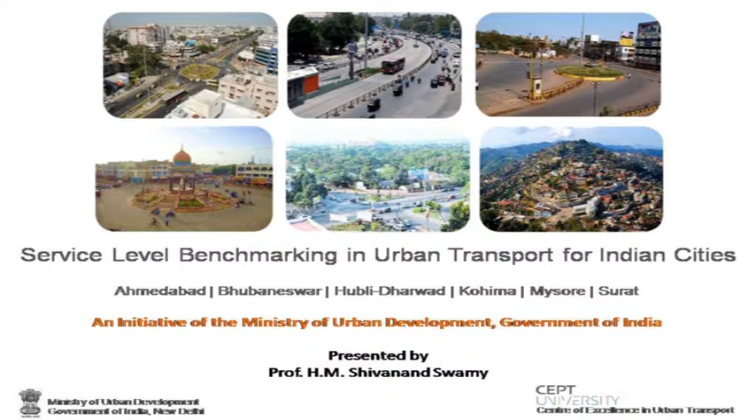We all are aware that service level benchmarking is a measure and a monitor. It is a framework to measure and monitor urban transport performance, established in India in 2010 by the Ministry of Urban Development. What is going on? How are we doing? Who has accomplished what, what are the best practices available today, and where are others, and how can we reach there? What should we do, what should be our targets, and how do we reach there - these are some of the kinds of questions for which one seeks answers through this benchmarking framework.

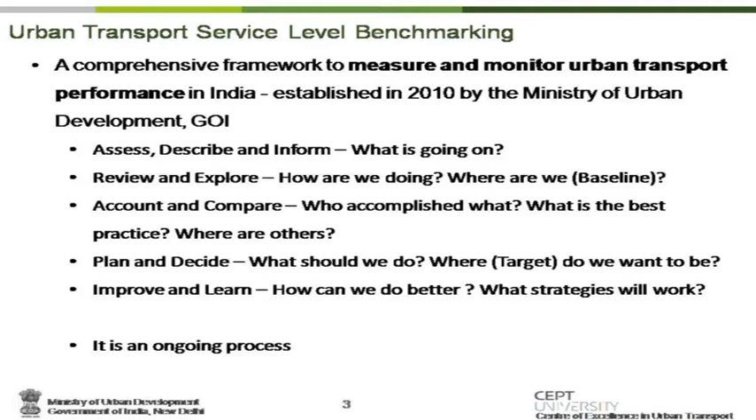It is not a one-time exercise, it's an ongoing process, and therefore it has to be integrated into an institutional process rather than standalone, done by a consultant or a research institution at any point in time.

Next one please. The periodicity part of it is an issue. We did the first round in 2011 and 12, predominantly in 2011. The second round was in 2015 and 16, after a 4-year period.

Whether it should be annual, linked to an annual budgeting exercise of the urban local body, or whether it should be done once in 5 years - it is right now integrated as part of the comprehensive mobility planning process. The question is, is it adequate just to integrate it with the CMP process? Even smart cities, when they were selected, that's also when they were asked to go through this benchmarking part of it. Is it adequate, or is there something more that we should monitor on an annual basis? That is a question we need to decide at some point as part of this discussion.

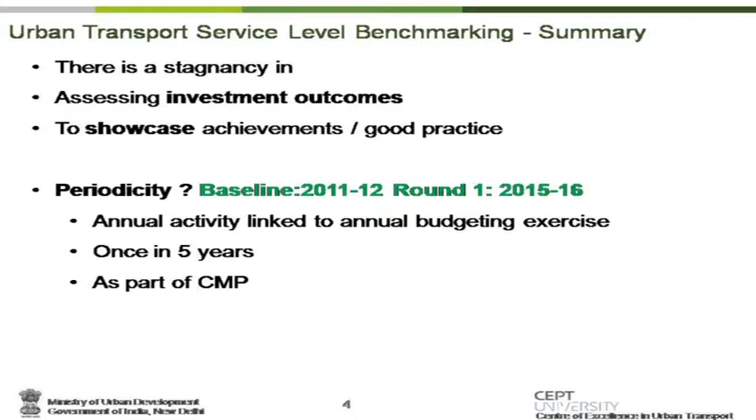Next please. The guiding documents available were the NUTP, National Urban Transport Policy, and the National Mission for Sustainable Habitat. They were the guiding policy framework within which the benchmarking was developed. Next please, I think we can skip that. The NUTP objectives are known there.

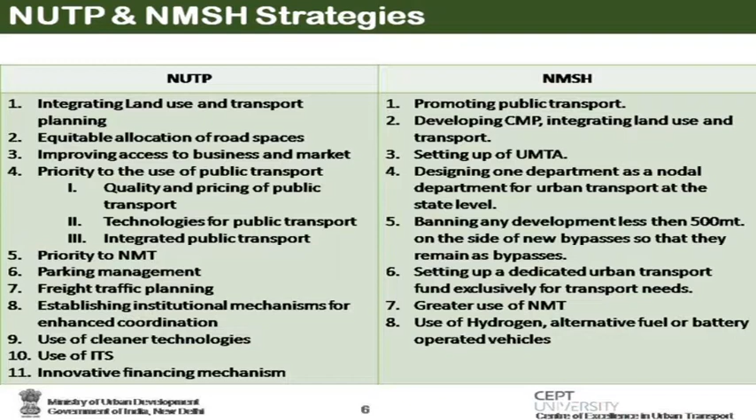We all know that when you do a benchmarking exercise, we need to have a framework within which it is done. This particular exercise is done with a set of focus areas or dimensions of urban transport, because urban transport is not just one aspect, there are several aspects. We have indicators, and we are trying to organize the framework such that the focus areas, indicators, and measuring those indicators - in terms of what to measure, why to measure, and how to measure - that is the overall presentation which I will be giving now.

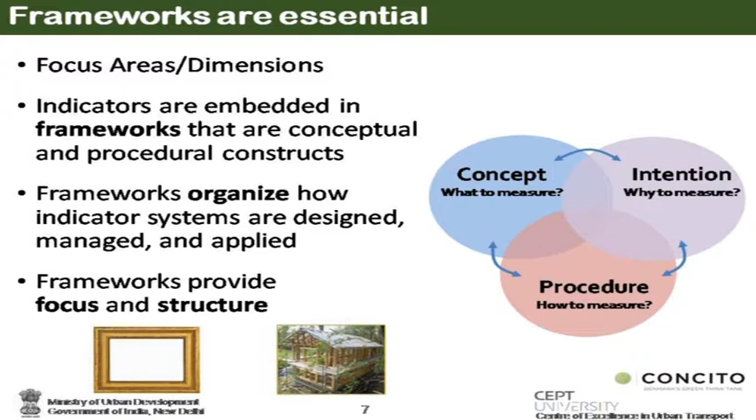Where are we focusing? Actually, urban transport decision making happens at the strategic level, tactical level, and operational level. This benchmarking exercise, being focused at the local level, we believe emphasizes the tactical and operational level right now. But when you look at it at countrywide aggregates, it will have strategic inputs at the national policy level. Therefore, the focus right now is tactical and operational, but it can be expanded to the strategic level. Next please.

Slightly out of sequence, but I thought we would cover some preparatory activities we had to undertake. One was defining the study area and benchmarking for a city. Number two, our focus on mobility or transport networks, which become critical, and how we identified those networks for studying. The transit network itself was another part of it, and how we identified them. There is a special focus needed for hilly areas, which I attempted in some way. Street lighting measurement was a difficult task we undertook, and I'll take a minute to explain it. Various surveys were conducted, both primary and secondary, which I will highlight.

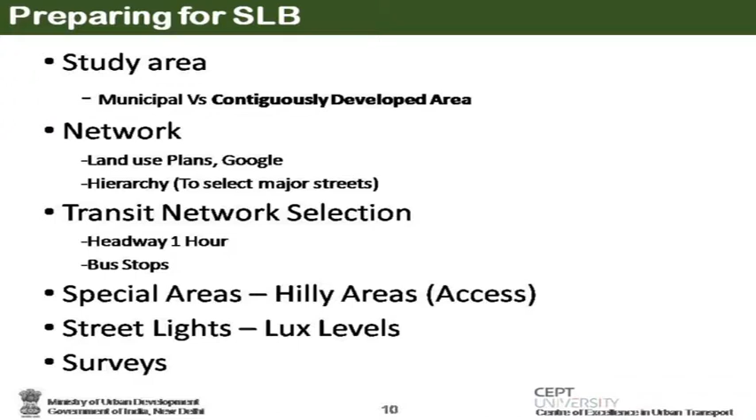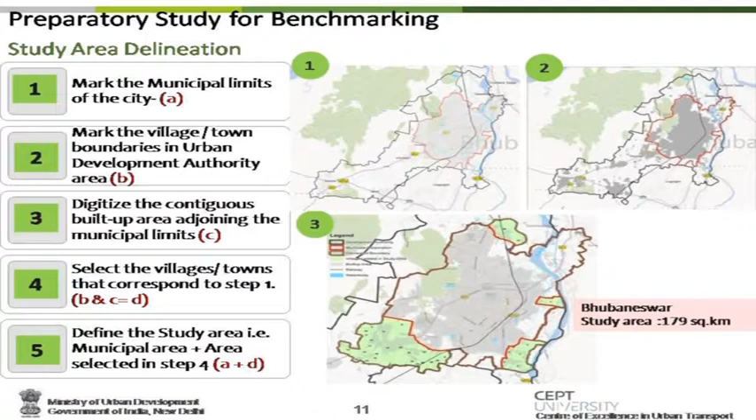Municipal corporation or municipal limits and the city are not co-terminus, because the city has grown in most cases beyond the municipal limits. So what we did for the study area was include all the municipal area plus whatever is contiguously developed area outside the municipal area. For instance, I'm illustrating this with Bhubaneswar. We are taking 179 square kilometers, which includes both the municipal area and the parts highlighted in green that are outside the municipal area but contiguously developed in terms of physical development.

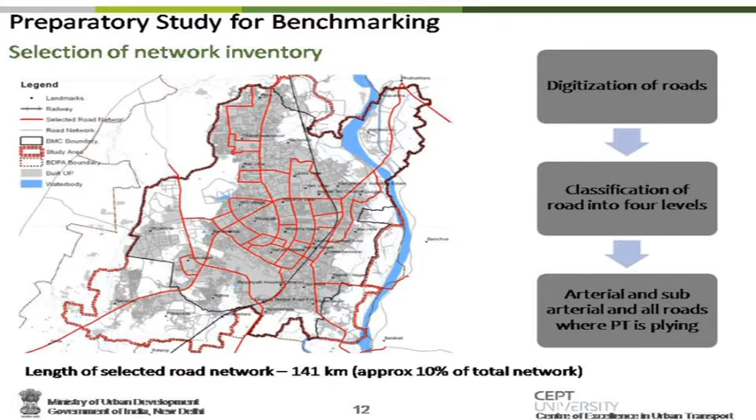We did not have readily available road network information—that was a very difficult part of it. What we did was collect information based on the master plan, other local area plans, plus Google Maps, and put them together as one framework. Of the identified network, we identified 141 kilometers as a major network, which is about 10% of the total road network. In that whole process, we identified the entire network.

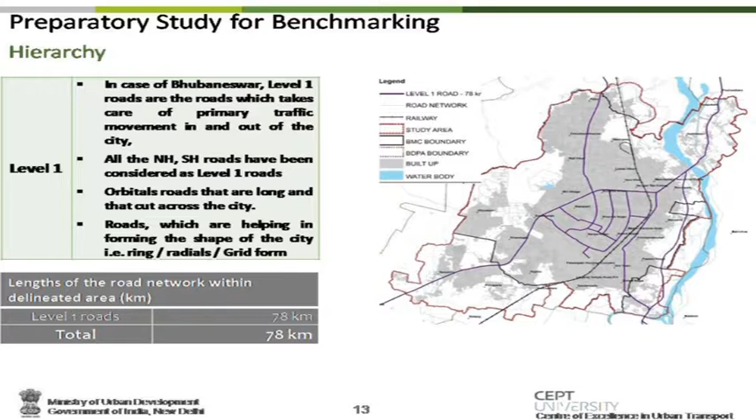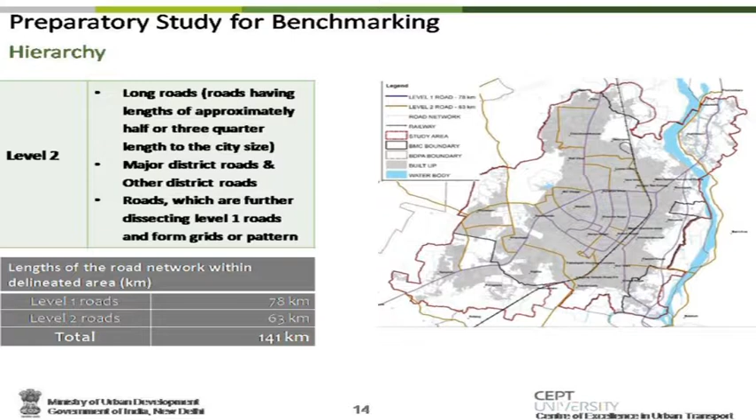We thought it important to have a formal classification of the road network into a hierarchy, so we defined level 1, level 2, level 3 and level 4. Level 1 is of the highest order—whatever defines the pattern of the city, whether it's a ring radial city, a gridiron city, or a mixed pattern network—whatever that pattern is, the network defining that pattern is level 1. Then the next level roads, which make up the blocks of various zones, become your level 2 roads. Level 3 roads are the next level, short in length, narrow in width, connecting these blocks, and the rest is level 4 roads. We have taken level 1 and level 2 for our study as part of this process.

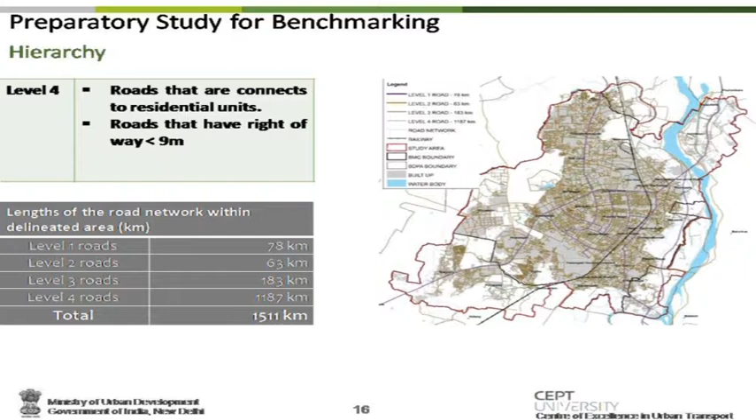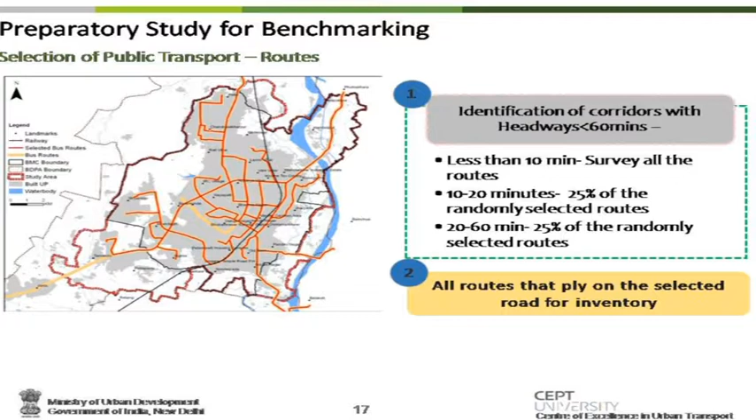For transit, when you talk about urban transport, the important thing is headway. If there are only 4 or 5 trips a day, that's not urban transport. Therefore, benchmarking defined that headway must be a minimum of 60 minutes or less, and that's how we included all those routes. Of those routes, we then sample-wise selected certain sets of routes in terms of high frequency, medium frequency, and low frequency. For bus stops and waiting time, we selected on all the major roads—we identified the bus stops, and then several bus stops in a random sampling manner were selected for delay time or waiting time.

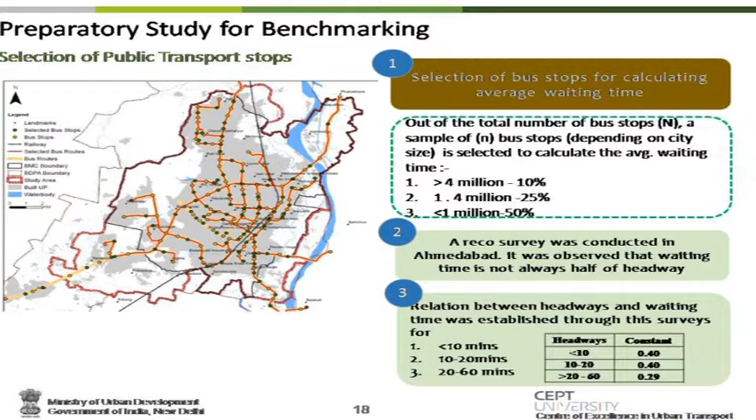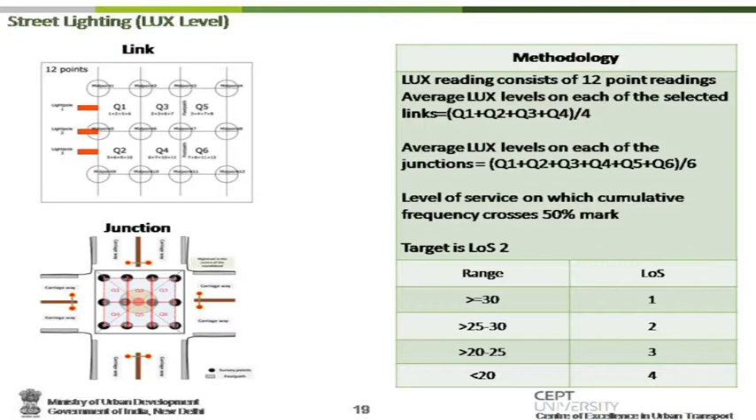For the street lighting methodology, we covered the entire network, and road-width wise, we took 12 points and averaged them. We followed what is generally given in the British standards for lux levels—that's what we took as the benchmark there.

Primary surveys included a road inventory in terms of encroachments and similar issues. We needed a level of comfort from load factor surveys on city buses, since we don't know how many passengers are on board at any time. Speed and delay surveys were conducted and checked against Google's speed and delay results, which turned out fairly close. NMT facilities at transit stations were also surveyed, along with lux level surveys.

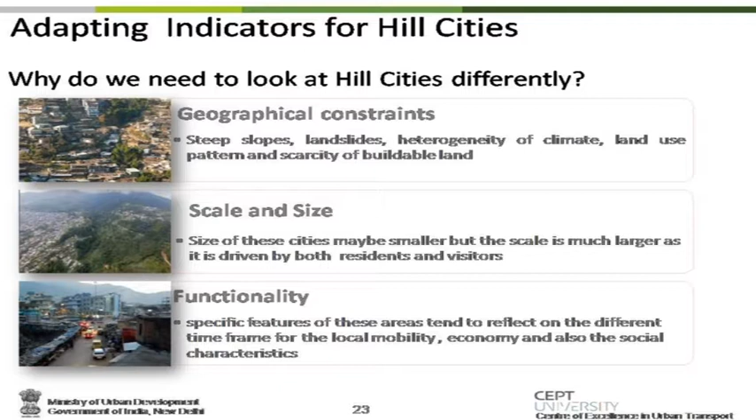As I said, hill cities pose the problem very differently. One issue was accessibility measurement. For public transport, we typically take 500 meters as a buffer in plains. What is the equivalent of 500 meters in a hill city was something that needed to be figured out.

Also, hill cities often don't have footpaths—in most places you have steps instead. When we did a user survey, we realized that the 500 meters covered in about 6 minutes in the plains translates to only about 230 meters in a hill station. That's the equivalency factor, so we took 250 meters as the accessible area for bus stops.

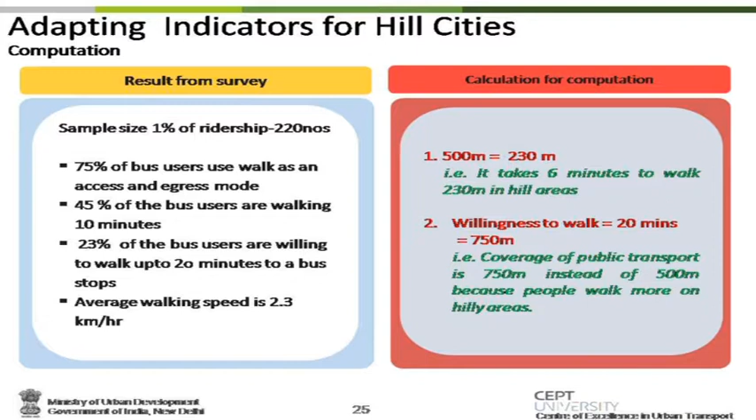We also asked how much time people are willing to walk to bus stations. Interestingly, responses came out as 750 meters and 20 minutes. Between the two options, we chose the first—230 meters—rounding it to 250 meters from the bus station as the accessible area.

Quality of footsteps was another important aspect to be evaluated. Would you like to say something about it, Nitika?

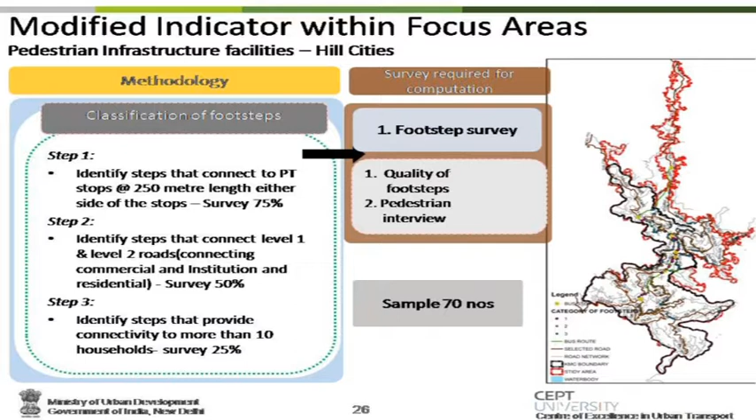Yes, when we looked at the footsteps, most were in very poor condition. We first needed to define how to measure them—both the number of footsteps and their quality, including lighting and overall condition. In some places small walkways led to important public transport stops. We took all this into consideration, assessing measures like tread, height of footsteps, daytime lighting, and width, as qualitative measures for surveying and evaluating footstep quality.

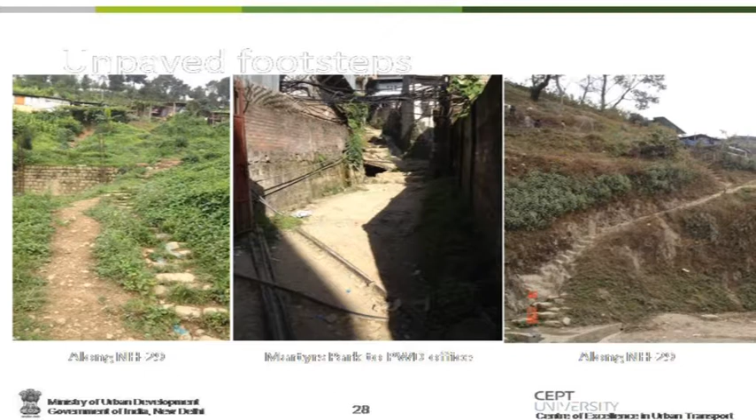These are some examples one sees in Kohima. Therefore, footpaths are almost non-existent in some areas there.

This is the background, and coming to the focus areas, the indicators and the measurement. Public transport facilities as a focus area.

Initially, there were 6 indicators identified: presence of an organized public transport system, extent of supply (availability of public transport, essentially number of buses per lakh population), transit accessible area (percentage of built up area within 500 meters of public transport), average waiting time, level of comfort in public transport (occupancy levels), and percentage of fleet as per urban bus specification.

If you look at public transport facilities, we need to view them from user and operator perspective. From the user perspective, we represent service availability first, and service delivery second. I think those two get covered. However, service effectiveness in terms of efficiency is not there, and financial sustainability is also not there.

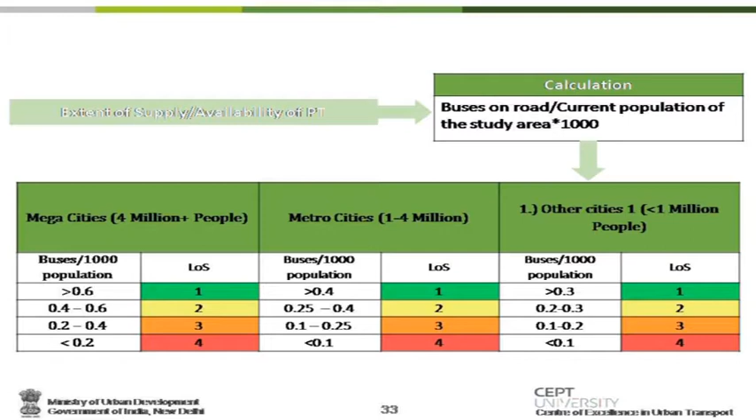Based on that, we classified it as level of service 1, 2, 3, and 4. Once we measure the focus area, we classify it as level of service for that particular indicator. Likewise, for all 11 indicators of the public transport focus area, the LOS was measured - for instance, presence of an organized public transport system in an urban area.

It was only yes or no - if yes, it is level 1, and if no, level of service is 4. Extent of supply of public transport was classified into 4 different levels based on number of buses per 1,000 population, and in this case it is level of service 4. Likewise, for each indicator, level of service was measured, and when you sum up all those levels of service, the total value you get here is 24.

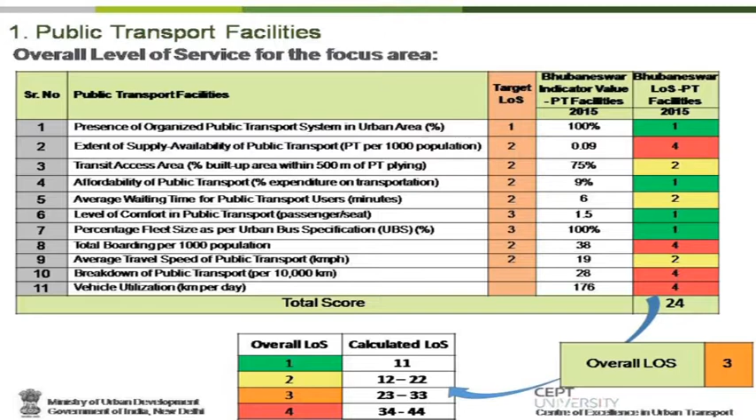There are 11 indicators. 11 is the lowest level possible, and 44 is the highest level possible. That was further classified into level of service 1, 2, 3 and 4. In this case, the overall level of service of public transport is classified as 3. That is very low. 1 is very high and 4 is low, and 3 is something better than the worst, but it's not really the case.

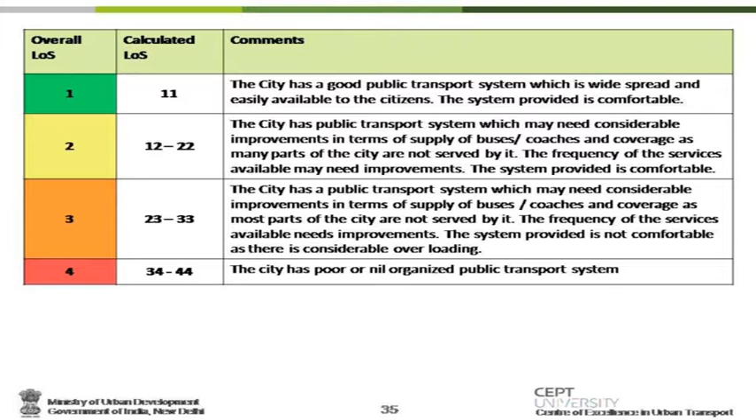For each focus area, there was an effort made to describe what it means. For instance, a level 3 service for public transport means the city has a public transport system which needs considerable improvements in terms of supply of buses, coaches and coverage, as most parts of the city are not served by it. The frequency of services needs improvement, and the system is not comfortable as there is considerable overloading. Depending on the characteristics, we define what it is all about.

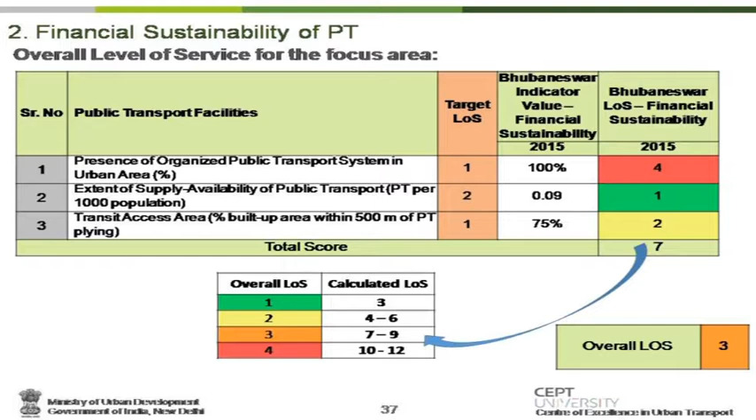This is the methodology for one focus area. Likewise, we did it for the second focus area, where again the overall level of service is 3. Their financial sustainability we have already talked about.

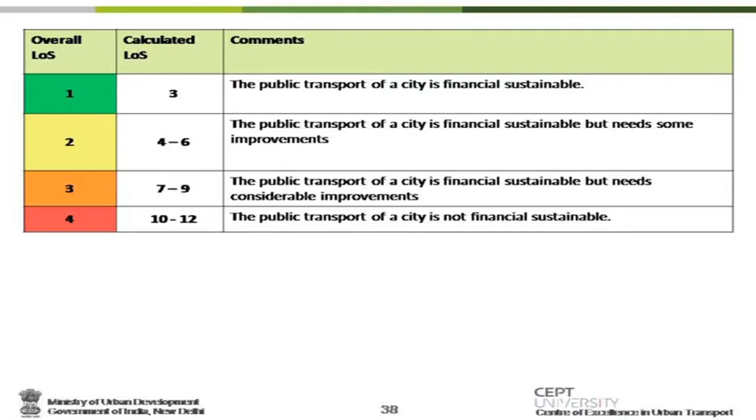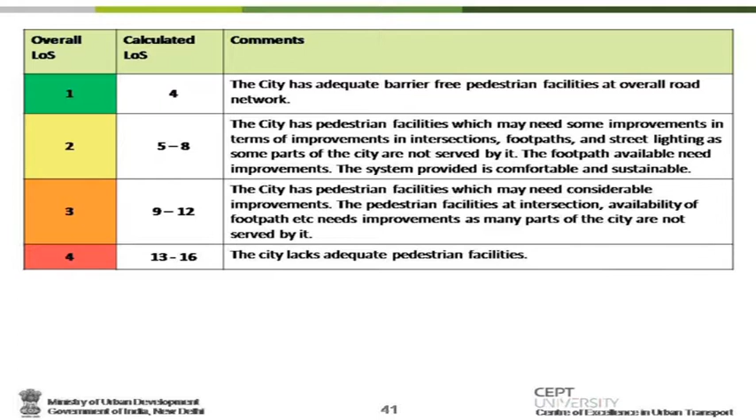The level of service for this focus area was also measured, with the highest being 16 and the lowest 4 in terms of the summed overall level of service. For this city, the overall level of service is 2 - they are doing well in terms of signalized intersections at least.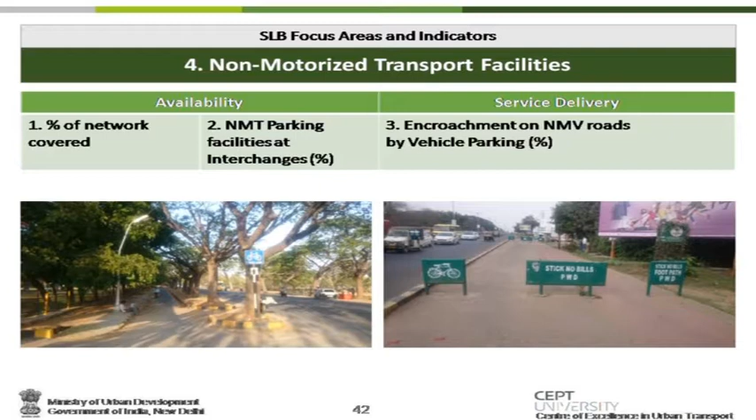In the same way, for non-motorized transport facilities: of the total major road network, how much has exclusive non-motorized carriageway, that is bicycle lanes - that's the first indicator, availability. NMT parking facilities at interchanges is the second indicator, and whether there is parking encroachment on NMT roads by vehicles is the third performance measure.

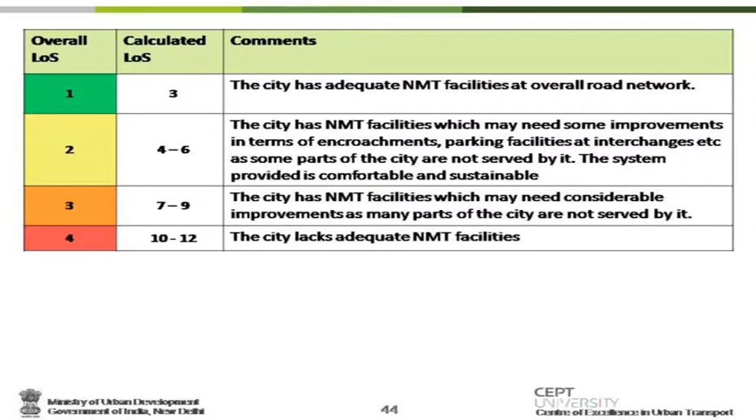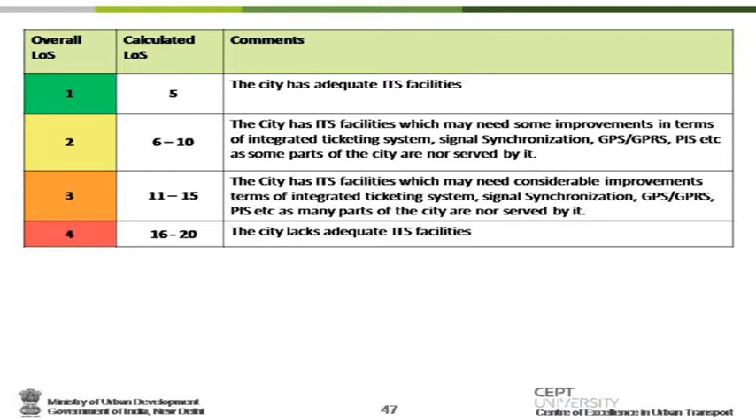We'll quickly go through the indicators list. For application of ITS facilities: availability of traffic surveillance on public transport modes, passenger information system, and whether GPS is used in the buses - I think these are the three. Then for service delivery, whether you have synchronization is one, and integrated ticketing system is the second for application of ITS.

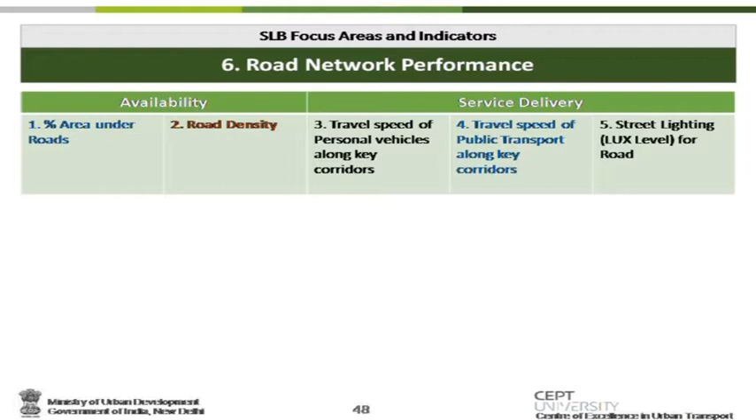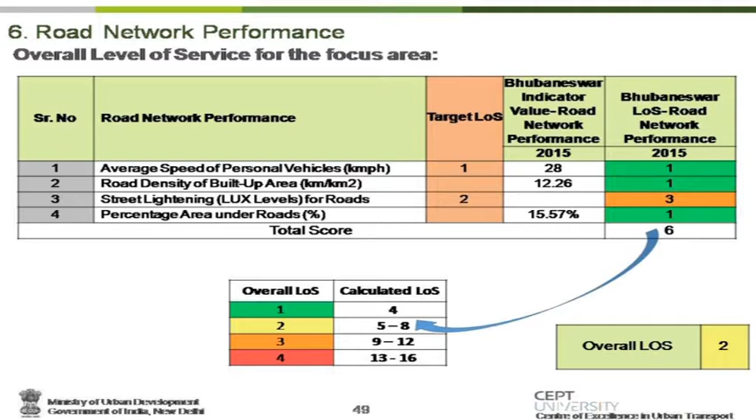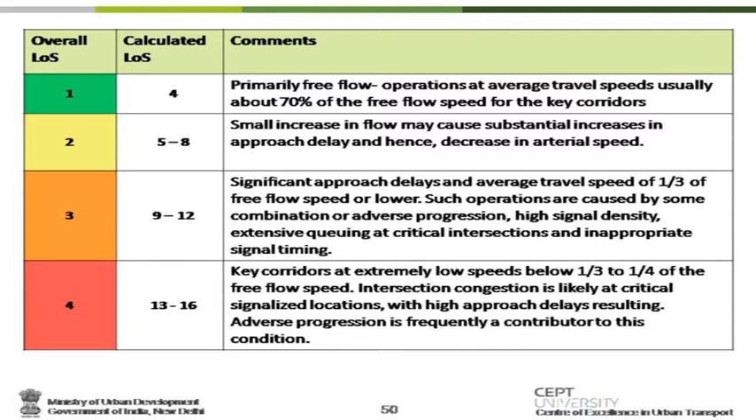Then there is road network performance. Area under roads, a percentage area, is one availability indicator. Road density is the second, which also defines availability - these two are somewhat overlapping, but it was thought necessary to have both. For service delivery, there are three: travel speed of personal vehicles, travel speed of public transport along key routes - though that's not here now, it has been shifted to public transport - and street lighting levels in terms of lux levels.

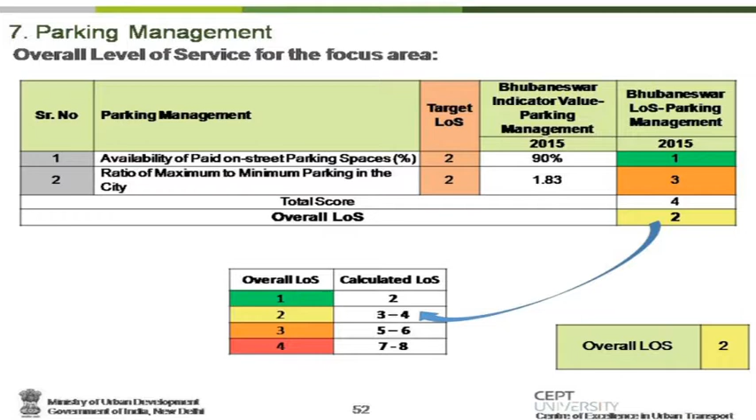For parking management, availability of paid parking is considered - overall parking supply isn't what's important. What matters is whether paid parking exists, and how much of the entire street network with parking is paid parking. Also, the ratio of maximum to minimum parking fee has been included, since there must be variation over space and time.

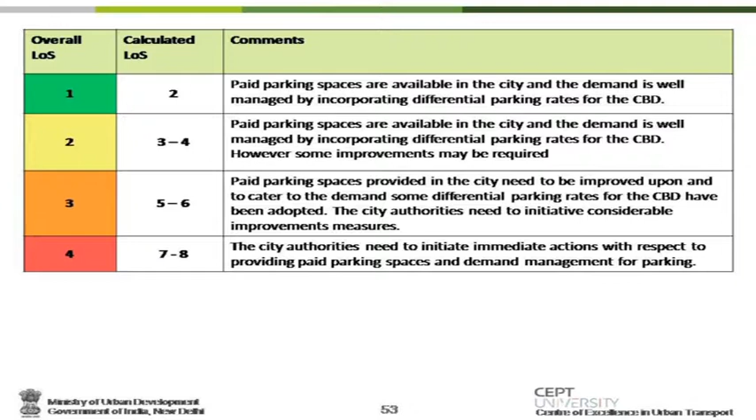Okay, that's the reason why that has been included. Road safety is the 8th focus area. Fatality rate is number 1. Fatality rate for pedestrians and NMT is segregated separately. If it is high, then it's even worse.

We added the third indicator because serious injuries and fatalities don't differ much as of now. I think it's important nowadays, especially with more passenger vehicles and cars coming in, that serious injuries need to be included. We have included that part. These are the three indicators for road safety.

This is a little tricky. I know you may have some suggestions on this. Tricky in the sense that we take annual mean concentration of SO2, NO2, and then SPM and RSPM. Both SPM and RSPM are included.

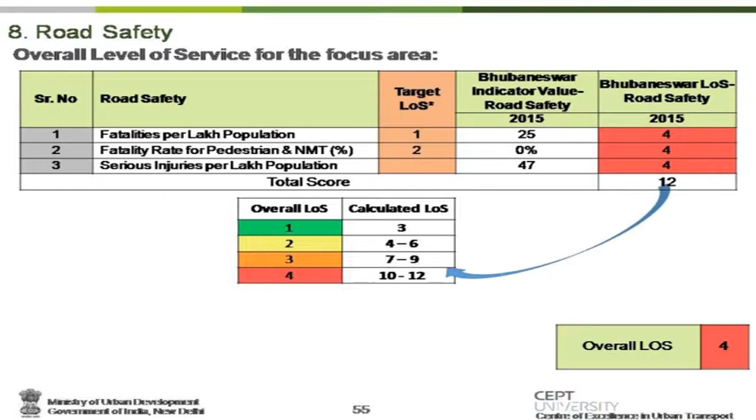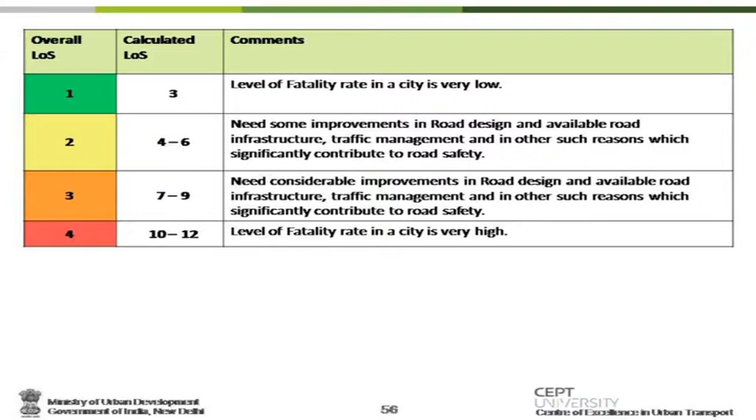And you take CPCB suggested guidelines and annual average data. The reason I'm saying it's tricky is that everywhere it looks fine when you take annual averages. Therefore, we need to relook at this particular indicator in terms of measurement. Otherwise, everything looks very nice and cozy. That's where the problems are, especially for the environment focus area.

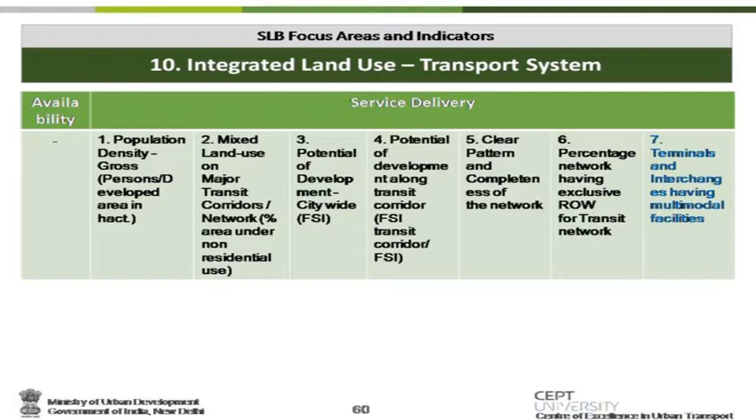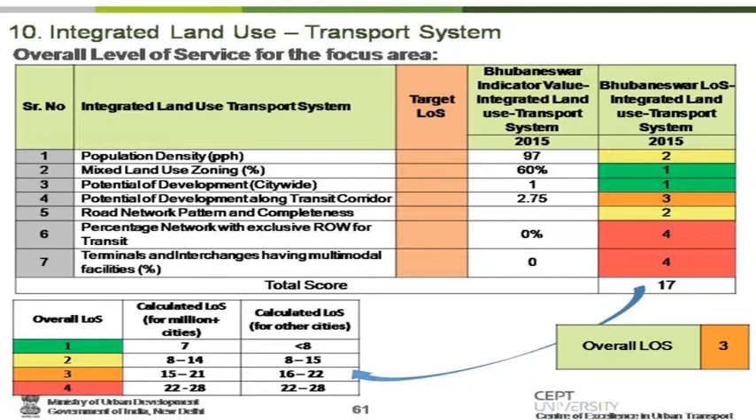Ritika? Integrated land use transport system. This is a long-term focus area because it comes out of master plans and land use plans. One is population density, second is mixed land use along transit corridors, and then what FSI is permitted in the city, FSI permitted along transit corridors, whether TOD is there or not, and whether there's a clear pattern of road network.

Percentage of network having exclusive right of way for transit is the 6th indicator. Whether there are terminals with multimodal interchange facilities is the 7th indicator.

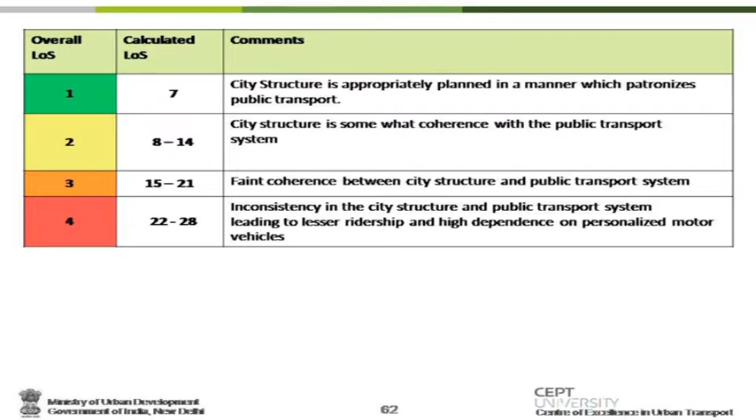Given this, go to the next one. The last one is intermediate public transport, which was added. One is presence of IPT per 1,000 people.

Generally, one thinks more is better or less is better. Here it cannot be that more is better and less cannot be better. If there are more, that means it's serving like public transport. If there are less, then options for people not having vehicles are not there. So it has to be somewhere in between, and that's how the indicator was measured.

An indicator classification like... stay there? Yeah, IPT per 1,000 people. If it is less than or equal to 4... actually 3.5 to 4.5, if that is the range you have, that's a good system.

And 2.5 to 3.5, and 4.5 to 5.5 - if that is the range, falling in these two ranges is categorized LOS 2. Then 1 to 2.5 and 5.5 to 6.5 is categorized as 3, and less than 1 or greater than 6.5 is categorized as... it's a new curve basically, that's how it's been classified.

And then whether they have ITS and GPS monitoring or not, I think that's a safety parameter which comes in there. And speed is something which is included.

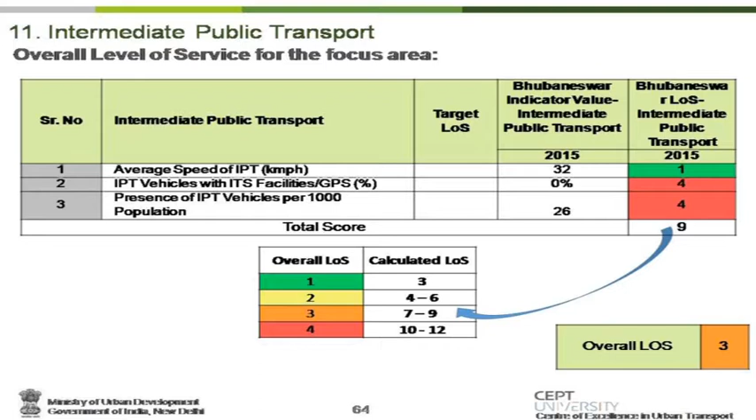Yes, taking all of this, for each city a report card is developed, like the LOS for all 11 focus areas. Summary of LOS for 2012 is measured, that is number 1.

And then how things have changed over a period of time, that is 2015-16, the current year's LOS. And then those changes, whether positive, negative, or no change, is attempted to be shown as part of the first serial number coloring, whatever has been done there.

Stay there, Nitika, one second. If you see there, there is some positive change in terms of pedestrian facilities. Otherwise, there is some change in parking management. Road safety shows a worsening part, that's a worrisome part. In most cities, road network seems to be improving, whereas public transport seems to be going down. We will come back to the conclusions part based on the cities.

This is the framework which has been used as part of the overall benchmarking. There is also an attempt made in terms of whatever investments are right now ongoing, and what their effect will be in the next 2-3 year period. That's an attempt which is there. We will show it as part of it.